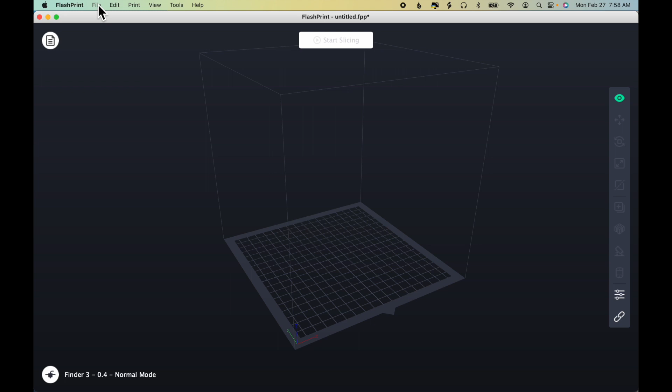Let's explore some of the other features in FlashPrint. I'll choose File, Examples, and this time I'll choose the clip and zoom in to look at it. It looks like it's got a very thin section here. I want to make sure that that prints solidly.

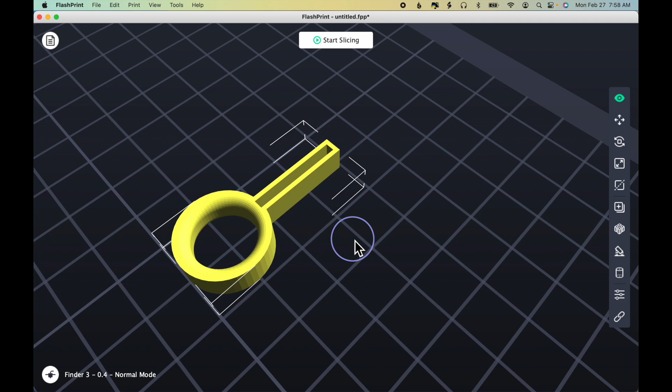And looking at it from the bottom, you can see that it has an overhanging area here where the inside of that ring is rounded. It's probably designed that way on purpose to smooth the inner surface so that it doesn't abrade the cable that's running through it.

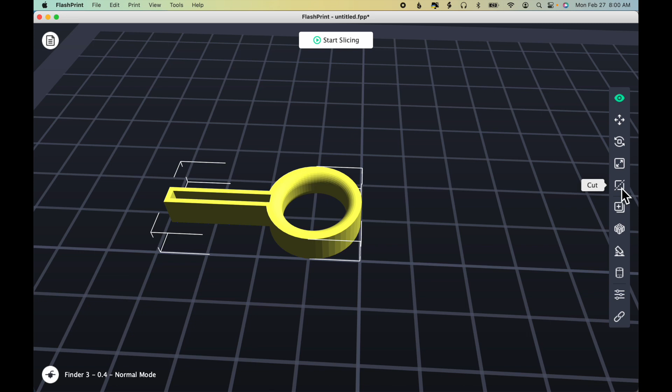But for our purposes, we're going to ignore the function because I want to look at one of the tools that's built into FlashPrint. I would like to just print this model without any supports. So I'm going to choose the cut tool and horizontal orientation.

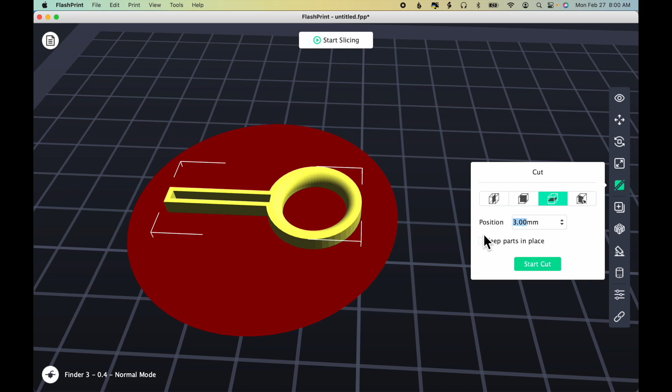I can move the cut tool up and down by using arrows or typing in a distance from the build plate. Right now this is 3 millimeters above the build plate. Actually, before I do the cut, I want to first see what the Z dimension is for the model, because I do want to retain the scaling of the model. So it's 6 millimeters tall.

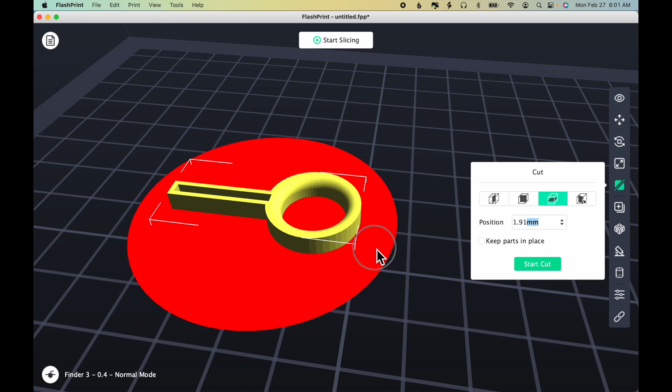Okay, now I can use cut, and you can see by default when you choose cut, it's exactly halfway through the model. You can also move the cut plane by clicking and dragging it, though. So you can see that the middle part of that model is straight, and then it starts to flare out at the bottom. So I'm going to move this up such that I'm sure that I'm in the straight flat area internally here. And I'll choose Start Cut.

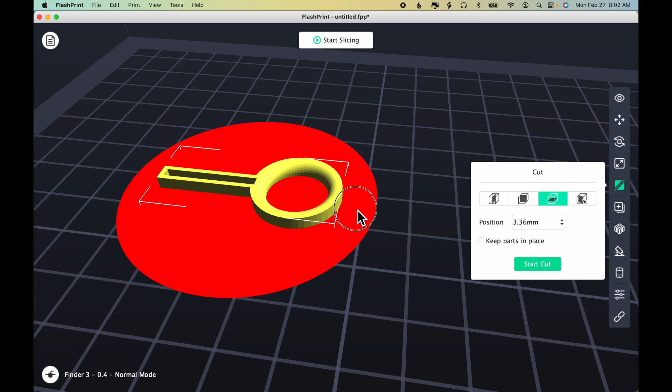Now I can click the bottom piece and hit Command Delete on my keyboard to get rid of it. I'll select the model again, and I'll drag the cut plane so that I'm sure that I'm in the flat area in the middle, and choose Start Cut, and I'll click and on my keyboard hit Command Delete to get rid of that piece.

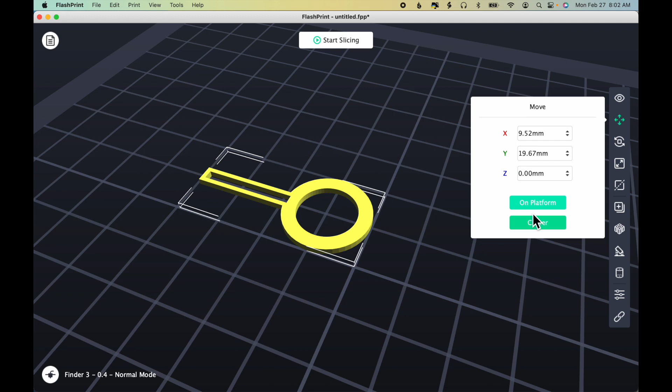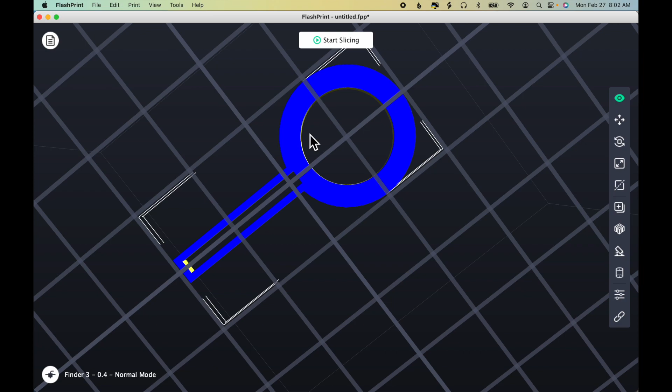So now I have a perfectly flat model. And if I click Move on Platform and Center, and look at it from the bottom, you can see that indeed it's solid blue and there's no red indicating any area of overhang. But I've lost the dimension of the model, right?

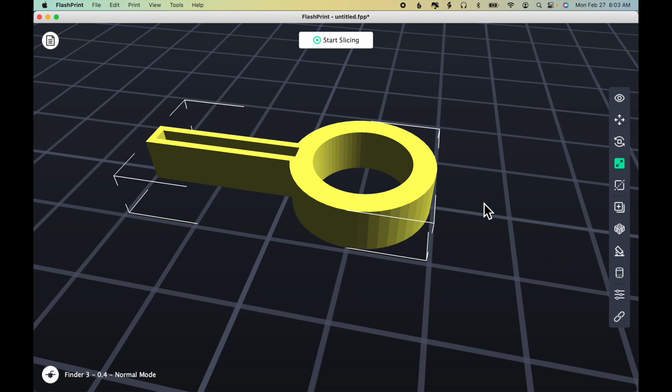So if I click Scale, the X and Y is still the same, but the Z is only 1.38 at this point. But I can rectify that by typing in 6. And there we go. So I have a modified model, but in the same dimensions as the original. I'll click Start Slicing, Restore Defaults, and I'll stick with the default settings, except I'm going to eliminate the raft so I can see better what's going on.

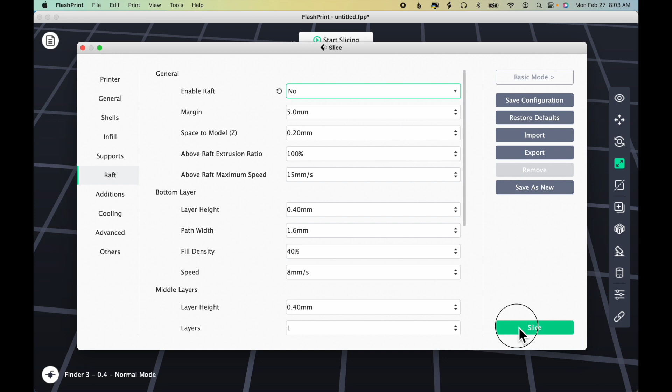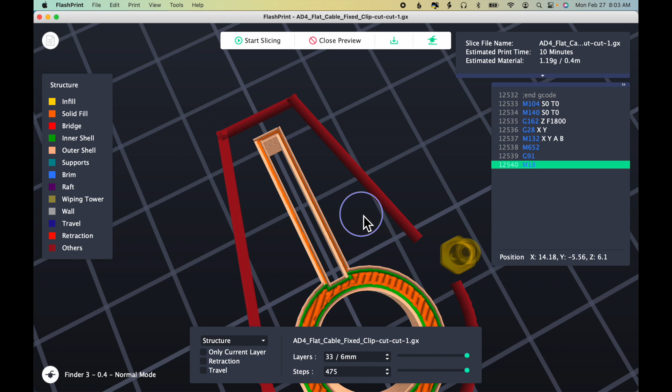Slice Preview. Okay, that all looks fine, but what I'm most interested in looking at is this skinny part of the model, because I want to make sure that it's not just printing the outside and inside walls. I want to make sure that it's printing a solid line for the interior of that skinny piece there. And I can best see that by clicking Only Current Layer.

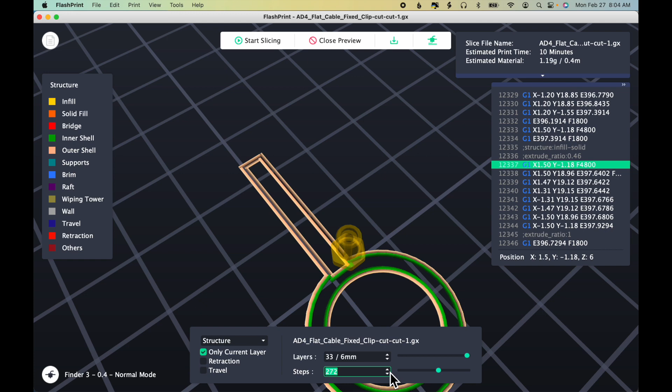And then I'm going to use the steps for the last layer and watch the nozzle as it prints that section. So it goes out and over and back, then prints the inner wall, and then it fills in this gap between those two walls, the inner and the outer wall. Okay, so that's good. That means that that should be nice and solid when it's printed.

And to verify that, I can download the model and print it. It's a quick print, only 10 minutes. It's good to practice with small, simple prints until you become familiar and facile with using both the slicing software and your printer. So let's print it and see what we get.